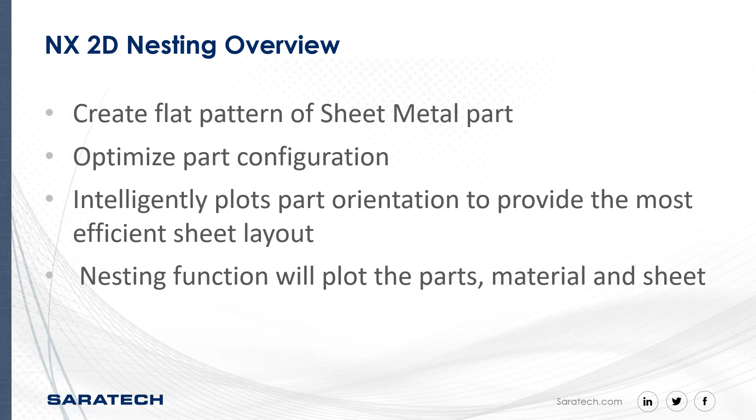We can lock them in position if we choose to. And the nesting function plots the parts, materials, and the sheets in an organized DXF file or a PDF file that you can carry through, and it creates a shop documentation type of product.

The first thing we're going to discuss is that most machines have a set parameter or a set layer that's going to define what type of cutting it's going to do. So layer 0 is generally a rapid motion, layer 1 is a pierce, so on and so forth. This is where we would set that information up, making sure these items correlate to what the machine is going to interpret.

When we're talking about feature-based manufacturing, we would set this to layers that we could then define in the feature-based manufacturing knowledge editor to say, whenever you come across a layer 2 item, we'd give it another attribute, say a color, to make all interior features magenta with a layer of 2. Then in feature-based manufacturing, we could say anytime you come across a magenta feature with a number 2 layer setting, that's always an internal trim with these cutting parameters, this operation type. That's how we would automate the system.

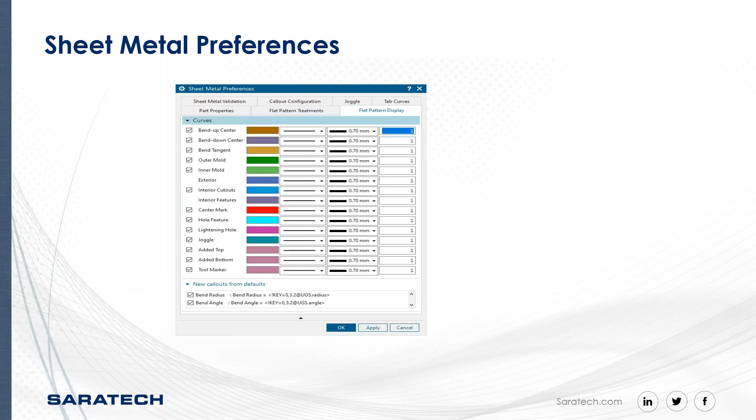So this is just defining your secondary process, whether it be the machine or NXCAM, how it's going to interpret those items.

Then we have our nesting settings. We're just going to run through the nesting direction. You're going to orient the starting point on the sheet of where it's going to start the process of the nesting. You have your edge distances and your part distances.

As you guys know, for the people who run these types of machines, there's a constant problem of your beam deflecting, no matter what, it's going to deflect a little bit. So if you get too close to a prior cut, it will stop cutting the part, and you'll have an error there before it starts back into the material.

Where it says cut layer and attach layer - cutting layers are going to force the system, whether your machine or NX, to produce cutting motions in that layer. If you needed to do multiples, 1, 2, 3, 4, it's just 1, 2, 3. Attach layer will attach the geometry, but it'll all be on the same level. So when you bring this into NXCAM, layer 1 is your cutting, and attach layer 2 would just be geometric data.

Then you have your nested input files. Once we create a standard, we could save it and then reapply it to the next parts. And then these are just your library for your stock and your output directories. NX comes with a pretty detailed stock configuration, but it's very simple to add new sheets to that.

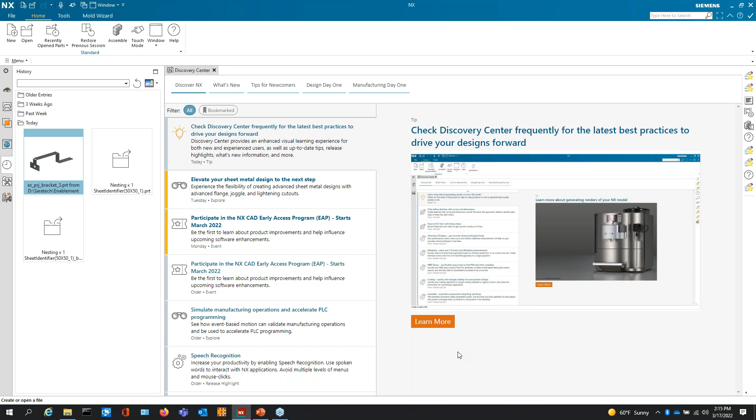So let's do this demo. I'll open this part here, and I'm just going to run through the process at which it takes, the entirety of it.

So there are a few things that you have to do in the very beginning. I have a sheet metal part. The sheet metal part must have a flat pattern. So what a flat pattern is, is where am I going to pick that it's going to be the standard surface that everything else is going to be bent to.

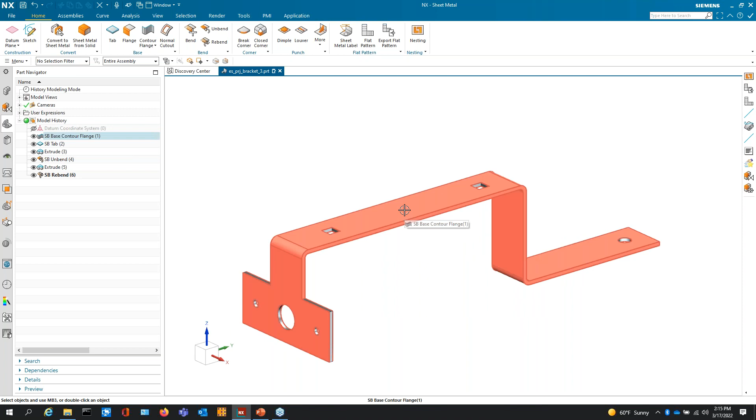So I come here to my flat pattern. I'm going to select this surface. That means everything is going to be bent to that plane. You see it bent it. This is telling me it created a view. Now, if I come over here into my views, this shows me my bend points, locations, and the flat pattern.

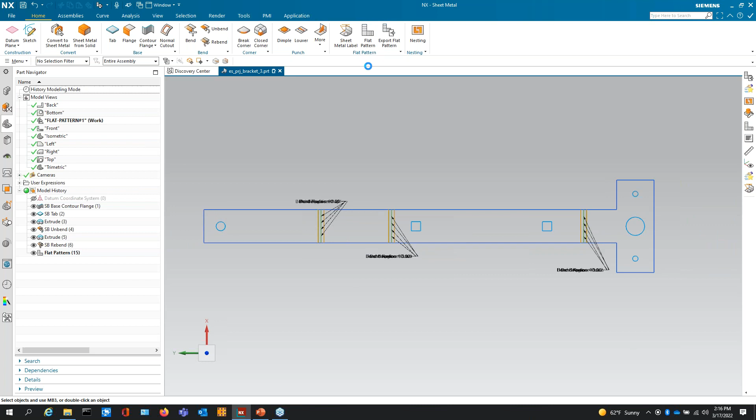So once I have this, I can export this flat pattern to a saved location. I have some setups here that I can, or some options that I can choose.

Now, once I have this flat pattern, I'm just going to open up a new sheet metal file, because I don't want to embed anything in the part file itself, because that defeats the whole associativity factor. You only want the information that that particular function needs to have in it. So modeling needs to have only modeling.

That's why we don't go in from the modeling environment directly to manufacturing, because that violates the master model concept, and we lose a ton of functionality. No more wave geometry linking, no more synchronous modeling. You do not ever want to manufacture in your model file, or do your sheets within your model file. You always want everything separated and linked back to the other file.

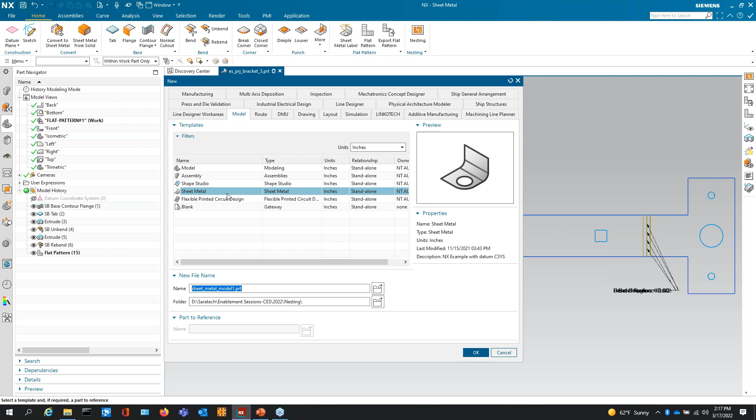So we're going to choose a sheet metal part. I'm just going to call it sheet metal model. Then right here is our nesting tool. We're going to come up here and use the nesting. I'll shrink this, or expand it, I'm sorry.

So we're telling it, what do we want here? I'm going to start from the bottom left corner, 1/4 inch in between parts from the edge of the material, and then 100 thousandths in between any entity of a part to another part. And then we're telling it our cut layer is 1, but I'm going to tell it that our cut layer is 2. And then I'm going to attach 3 and 4.

This is the library at which I'm going to choose, and that library lives inside your hard drive here, 2007 UGII materials. Then I give it a location to save to.

Now, the previous icon, or the previous slide in the deck, I showed you about the preferences. So we want to come in here and make sure we set these preferences to what can either make NX CAM go faster, or what our machine control understands. There's only 3 items in here that are relevant to me, unless you do those types of things. So I'm going to make this layer 5, which is not what I'm going to include.

I'll do layer 5 for the bend down, bend tangent. I'm cutting things, I'm not bending things, so I don't really care about those parameters.

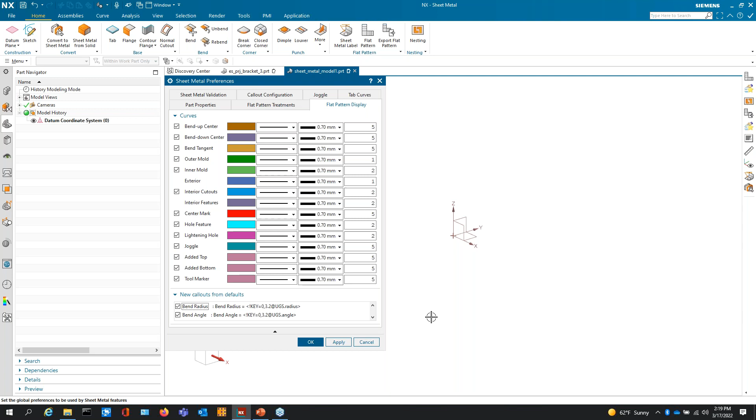And I'll show you why I chose this method when I go into the CAM process.

Okay, so I gave it these parameters, gave it save locations. Now I have to tell it what stock I'm doing. This is basically like feature-based manufacturing. You're telling it, what am I working from and what am I getting to? And it'll cut all the rest of the material out.

So I'm going to add some stock. Now, just running through this so we can see it, this is pulling from that library I just showed you—standard lengths of materials, standard widths of materials. And if you had your own stock list, they would show up here as well.

You could create your own drop downs to where it would say 1010 material, 4140, whatever, D2A2, whatever you wanted in there, whatever your particulars were. You have thickness, physical materials.

You have a lot of options in here, and these all drive processes as well. So what you're choosing here is going to define an attribute in the material, or the material list that you produce through nesting. That's why if you use a part file, you have to have all the attributes correct before you could use it.

So we have a lot of different selections here. For our purpose, we're going to use a custom stock. I just gave it a 50 by 50.

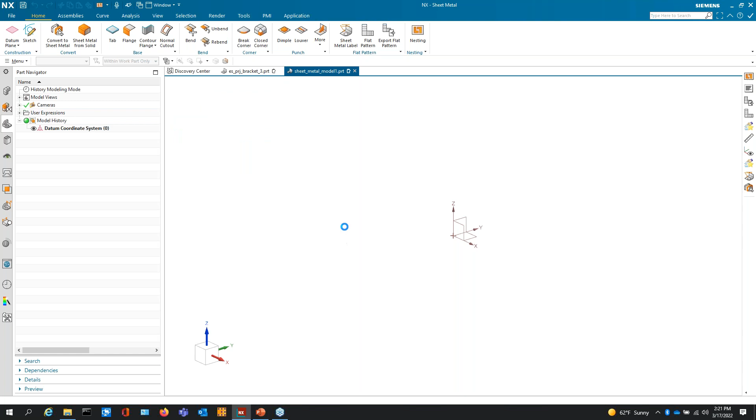So now priority, we have different priority options. We can now add a part.

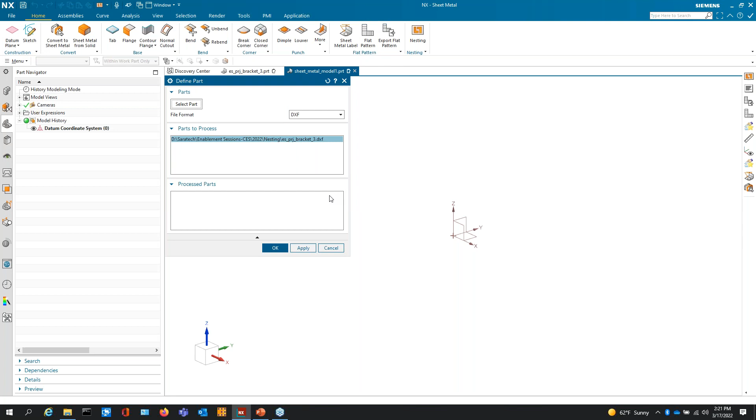So I chose DXF. Right here we have part files. I'm going to select the DXF file that I just created of that flat pattern. And now I've loaded it into the system.

It's now looking at this and saying, this is my part. DXF was the original format. I don't have any material. This is the thickness. Here's my quantity. Rotation, 0, 90, 180. I can lock it in position depending on grain.

Priority, I can tell it that I have to do these first. I can have to do that second.

So what you're going to do with priorities is, say you had very, very large parts coming out of a sheet, but you also wanted to put smaller parts in the gaps. Well, if you go cut the big pieces out first, your sheets may warp and move, and you have dangers of hitting heads and things of that nature. So you could say, I want the lowest priority on the large items and the highest priority on the small items. So you have sheet structure.

Okay, so now once we do this, say this part, we need 50 parts of that particular. Now, if I went through here and I put in an entire assembly, you also have another option.

A batch quantity. So say I need 50 of these Craftsman toolboxes. Whatever parts list I have loaded here, no matter what thickness is, if I put 40 here, it will give me 40 quantities of however many quantities the parts are. So it would plot out the number of builds that you need, and the quantity of parts would be what it needs in the particular build to build it.

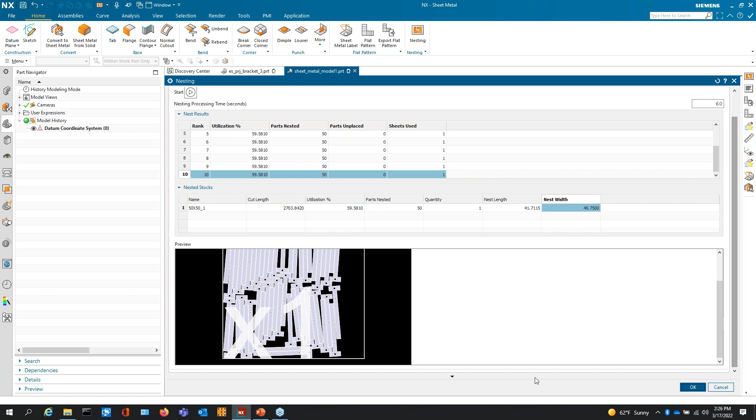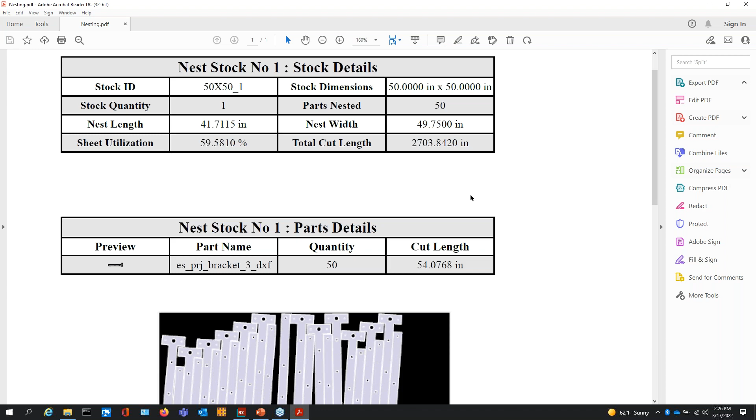Now it's given me this nesting PDF, and what this nesting PDF does is hold all the information - the stock details, number of parts, the cut lengths - and it gives you your visualization.

So now it also gave me a nesting sheet part file, and a nesting sheet DXF file. So now if I go in here and open up that part file that it created...

If I were in the first option where I'm not going to take this into NX CAM and stay within the PLM environment, still using my onboard logic that works off of layers, you would just take the DXF file out to the machine. That simple with NX. But always remember, right now NX and your current software are apples to apples.

Where does NX shine, and why would I want to add a little more complexity or work to my job? I'm going to show you the reason why that 5 or 10 minutes of extra work is going to be the reason you'd want to bring all this into NX CAM.

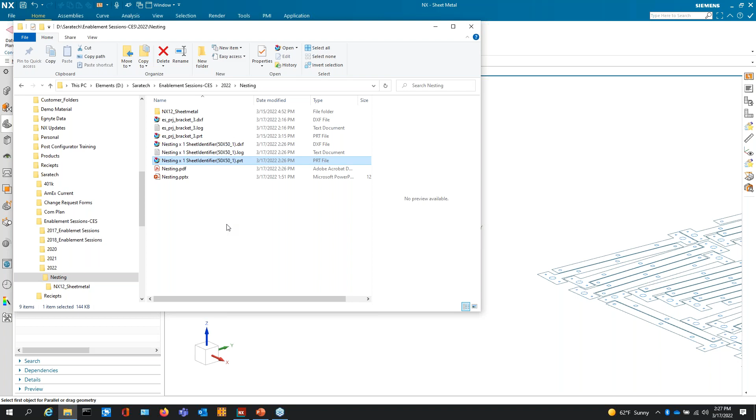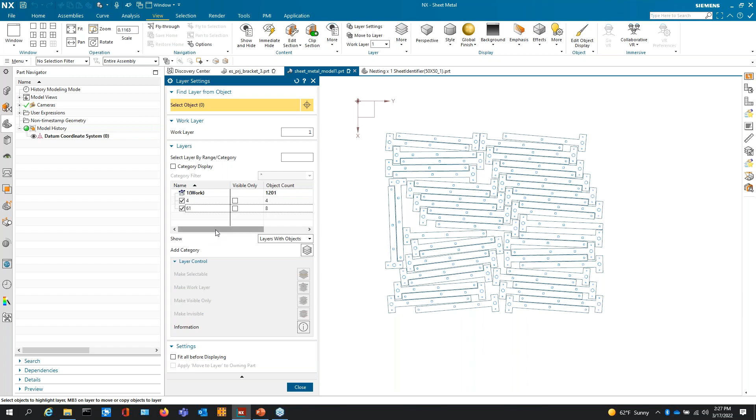So we opened up this part - this is my configuration. Now, the reason I did the layers the way I did is because I wanted to have something to distinguish the items, so that I could pull this information from Feature-Based Machining if needed. We could use that information to drive logic.

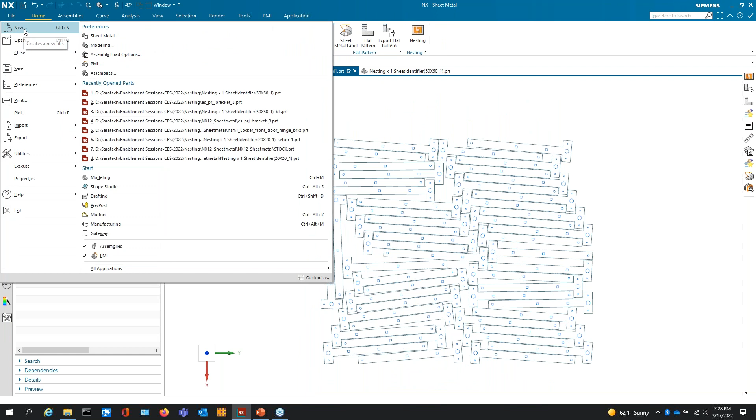So now we're in NX CAM. Now we're just going. So this is the DXF file, or the part file, I'm sorry. So now we go into NX CAM just the same way as we always do - create the master model process. File new, we're going into the manufacturing tab, we're going to create the general template.

General template, save locations, everything is identical, part to reference. Now that we've created this manufacturing file,

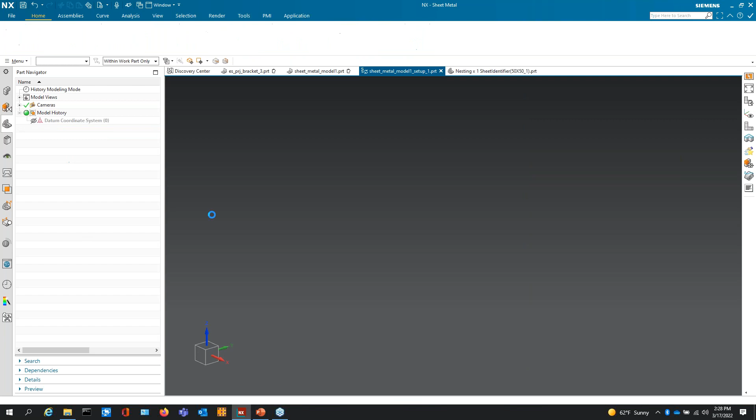I'm going to go ahead and start to program. Now, if we built this into feature-based manufacturing, I'm not sure if anybody watched the last two feature-based manufacturing videos that I've done, but when we go and find features, it works off of the model. It doesn't work off of geometry. So we would have to build a process to where it now looks at geometry as identifying features.

And then you see how it built different layers. The outside is one layer, the hole is another layer. So it would choose outside profile, inside profile automatically by 7 clicks of a button. So that's the automation portion of the programming.

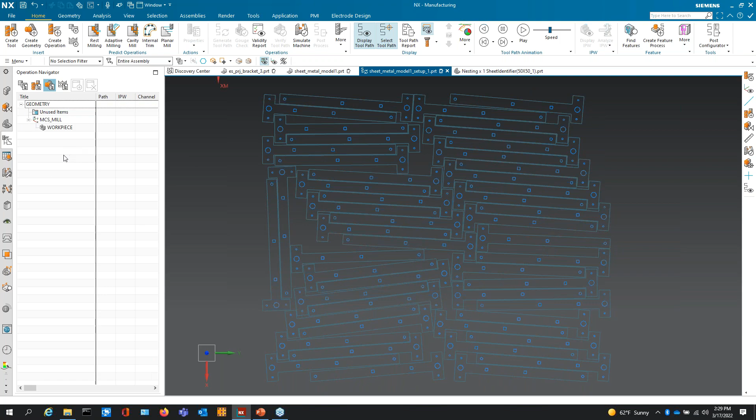To show you how it works, there is no need for workpieces or anything like that. We would want to set our MCS at the correct corner, but I just want to show you processes. So we would just create an operation. I'm going to use Wire EDM, the same technology.

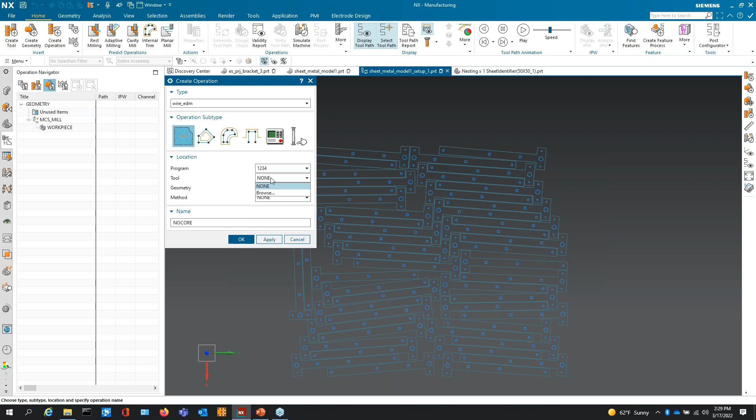I don't have any tools created. So we're going to go ahead and grab one from the library. And of course, if you were doing this in real life, you would want to be much more accurate than I'm just demonstrating. So I'll grab this 8-thou wire.

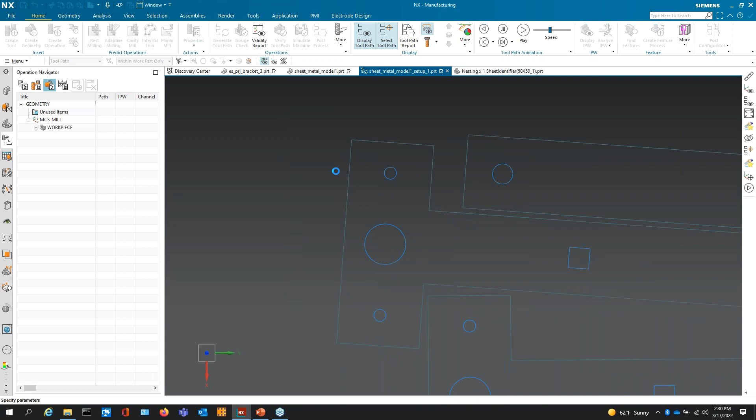So now what I would do is I specify my wire geometry. I'm just going to do this on one part.

So if I were to have done this slightly different when I exported the DXF and claimed these different features as different entities, then in the layer settings, I could hide layer 1 and show layer 2 and just do a wide box selection like this of all of the features. And then I could create an internal off of that.

I didn't do that, so I'm going to have to do this manually. So I'm only going to show you a few parts. So we're going to select curves. We'll check connected curves. Now, anytime that you jump off of your feature to a new feature, you want to hit add new.

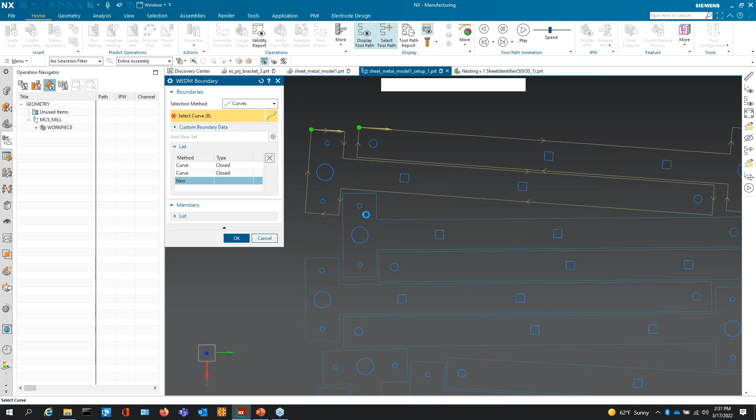If you're inside of a feature, like say your tool doesn't have to jump over to a different location on the part, it's fine just to keep selecting. And there are circumstances where you could select every one of them in one, and it does things fine. I've just found it better for NX's computation ability to do it with adding each individual closed feature as a different item.

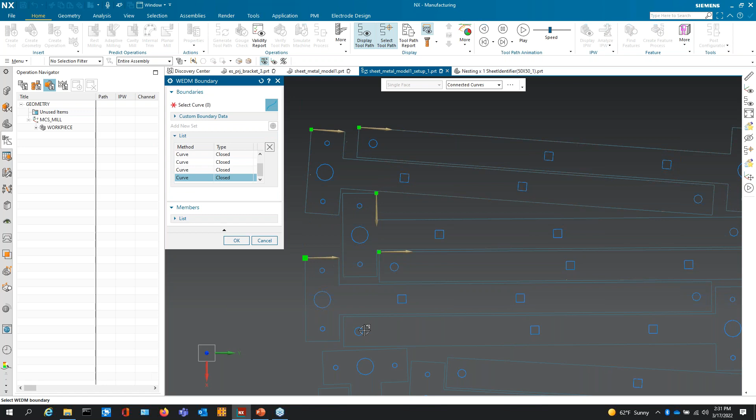So now I'm just selecting a few parts. So now I have all my toolpath.

So now what would we do with if you had start locations, or what if you had lead in, lead outs that you needed to do? We can automate that entire process.

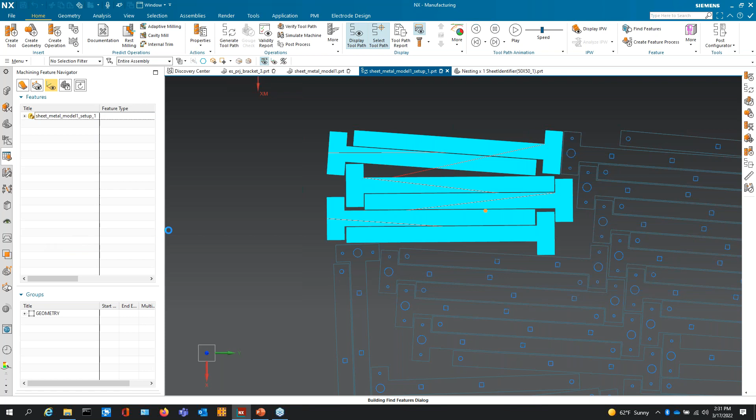That entire process can be done to where all we have to do is come over here and hit find features. We haven't turned this on, so it's going to tell me I can't do it. But that was one click. Tell it what we want. We would say sheet metal, internal, external features. 2 clicks. It would then find the features. Right click, group features. That's 5 clicks. Right click, create feature process. 7 clicks. 7 clicks of a button.

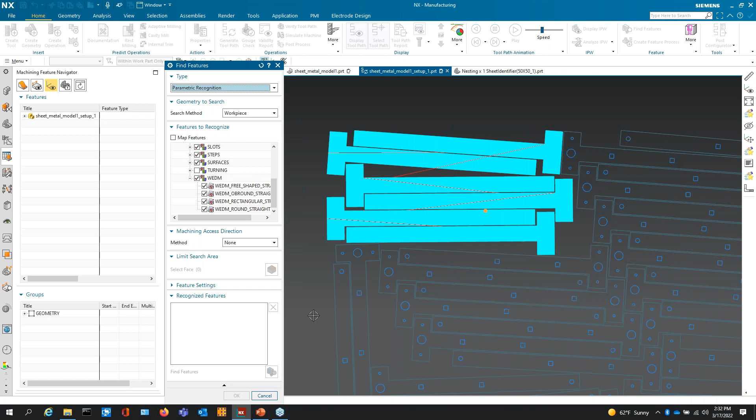We could do any complexity of a 2D nature that could ever be. So you could automate this entire process and never have to do more than 7 clicks to program any type of wire, laser, plasma, anything like that. And I'm talking 2D and 4D. So 2-axis or 4-axis, it's all the same thing. We can automate all those processes. We just cannot automate the full 5.

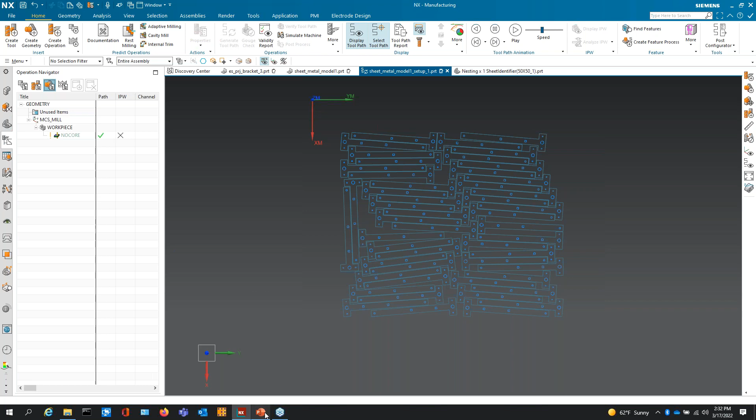Okay, so after seeing the demo, I want to talk more about what does this mean for NX CAM and feature-based manufacturing, because that is the heart and soul of what we were lacking for all these years.

We have these highly sophisticated modules that are automated to output these very, very extravagant types of operations like flat patterning or simulation, and we never really had a tool that efficiently helped us with those types of machines. And the simplicity of the current system, I could buy, or not even buy, I could go online, download AutoCAD LT for free, 2007, and I could run a water jet machine efficiently.

But I have nothing to structure this with. If something changes, I'm always starting over, no matter what. So I would rather take 15 minutes longer on each part than to be able to recuperate from a model change within 5 minutes than to have to reconfigure an entire sheet or several sheets. So there is an immediate ROI on going into NX CAM and utilizing feature-based manufacturing than sticking with your simple current working process. So I really want to make it apparently clear that I understand your process.

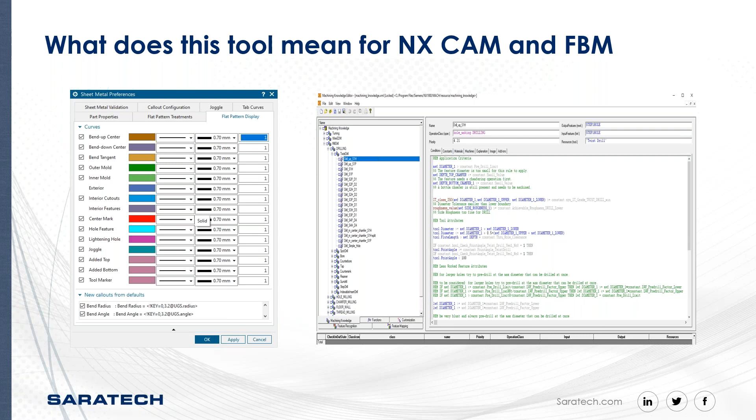So now let's discuss the role of PMI, because that's also very important. PMI stands for Product Manufacturing Information. Feature-based manufacturing has a ton of information in the library out of the box already.

It can find an enormous amount of feature types, and it can automatically program an enormous type of feature types. But if you were to add PMI data to your process, you can refine that down so tightly that NX can understand that if it has a 10 millimeter hole, it needs to drill, and this is for a slug to fall through. It can center drill and just pop a drill through it. It could flame cut it out for all I care.

You add an H7 tolerance to that. Now NX says, okay, I need to have a center drill, carbide drill, pre-bore, post-bore. We can drive all these processes off of feature-based manufacturing. We could make it as simple as numbering your exterior features with a numeral 1, your interior features a numeral 2, and whenever feature-based manufacturing runs against that, it will pull your processes, no matter how defined they are.

If you're creating a part that has to have the best finish possible, or if you're in a wire machine and you have to do skim cuts, or breakpoints to be able to put Bondo in or catch parts, we can automate that entire process. There's not a single thing on a 2-axis machine or even a 4-axis machine that we cannot automate. So it's very important to take your software to the fullest of its capability, and PMI will drive that process to its fullest.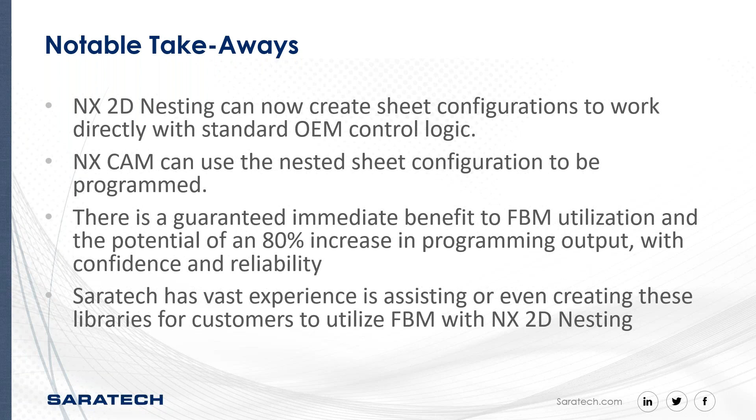The first question is, how does this solve the disconnection issue we see with our current software? That's a very good question. Your current software has no care in the world - all it does is cut. You give it a part, a profile, tell it a few parameters, and say do it. With NX, it's built upon the associative model. So within the CAM environment, we're now linking things to the original model. The design content is driving all past and downstream applications. Your current software is not set up to do that - it's set up simply to give you a program. So once we implement this higher level technology built upon a management system and a model system, we're now bringing this into the fold of PLM, product lifecycle management.

And when we do that, we create those associative links by using the nature of the software. So we can't compare NX to any third-party software or onboard controllers, because they were built just to create code. There was no higher level technology or logic implemented in the background to make things associative or have that controllability.